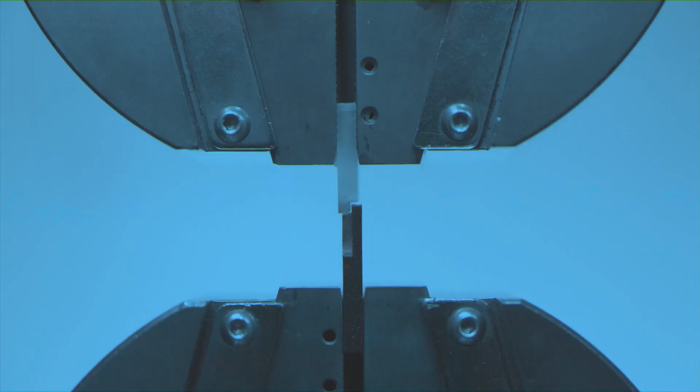We know now how to design the joint for tomorrow. But what about its behavior in 10 years or 20 years? What about the effect of water, temperature, fatigue, the loading type? These topics will be discussed in the last module, module 12, durability.

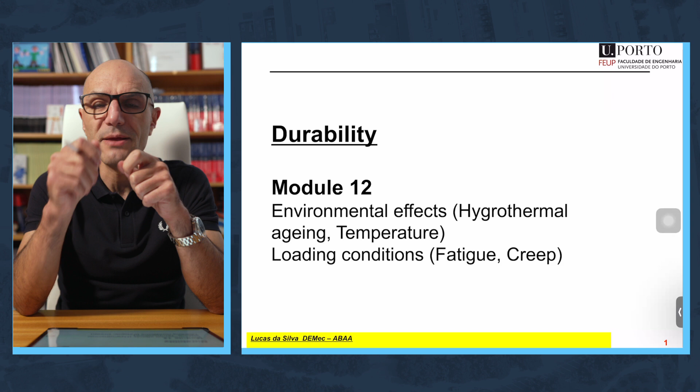So now we know how to design our joint, but only for tomorrow. We don't know how to design in the long term, taking into account effects such as water, temperature, or the loading type such as fatigue and creep. That's what we are going to see now. This is a very important issue: durability. So let's start with the hygrothermal aging effects.

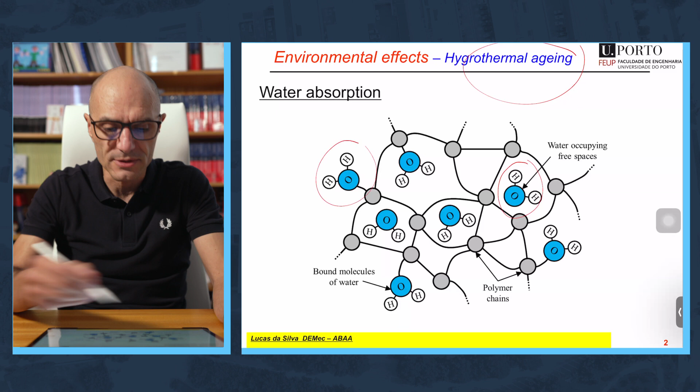Adhesives are polymers, and polymers absorb water. The water can diffuse inside the adhesive, filling gaps between the molecules, or combine with the molecules—this is called bound water. But what we want to know is how fast the water ingresses, diffuses into the polymer.

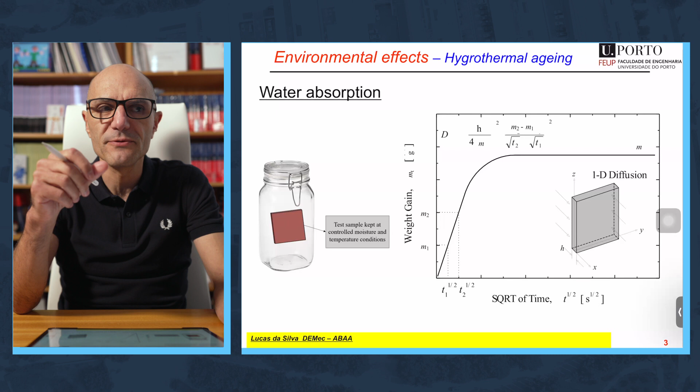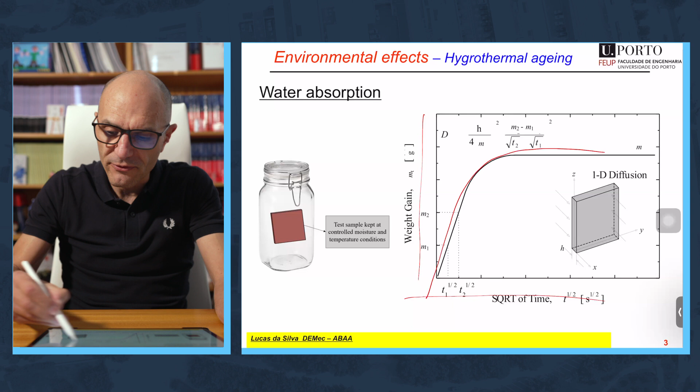This can be done by weighing small samples of the adhesive periodically. If we represent the results in a graph, weight gain versus square root of time, we get this type of curve. With this curve, we can determine the coefficient of diffusion of the material.

It's important to know how fast the water goes in, but it's also important to know how the water affects the stress-strain curve. For that we take dog bone specimens, tensile load them, and see how the stress-strain curve looks.

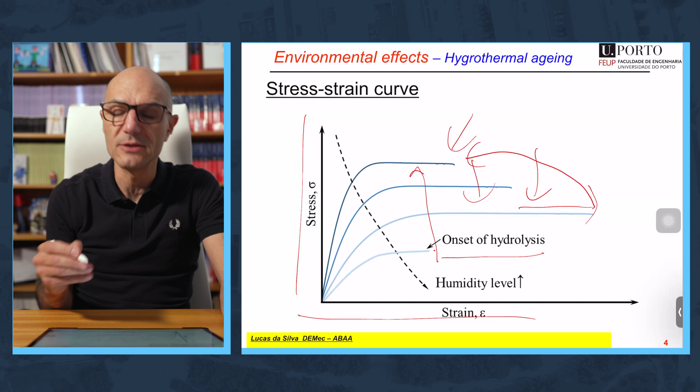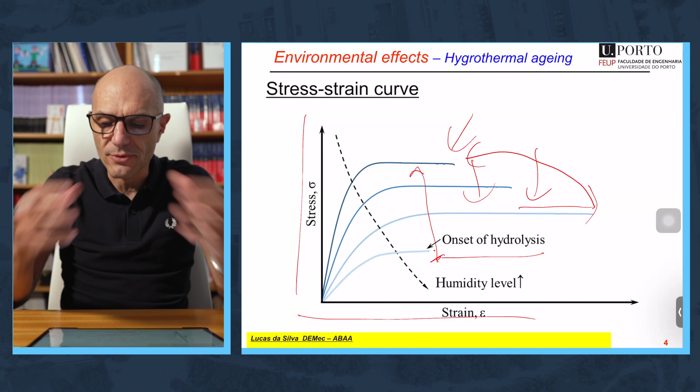In that case, you cannot go back by drying the adhesive. Here, if you dry, you can go back—it's called physical degradation. When you have chemical degradation, it's over; you cannot recover the adhesive. So a bit of water is not bad actually, because it increases the ductility, and we know that ductility is very good for the joint strength. We have seen that in the joint design part.

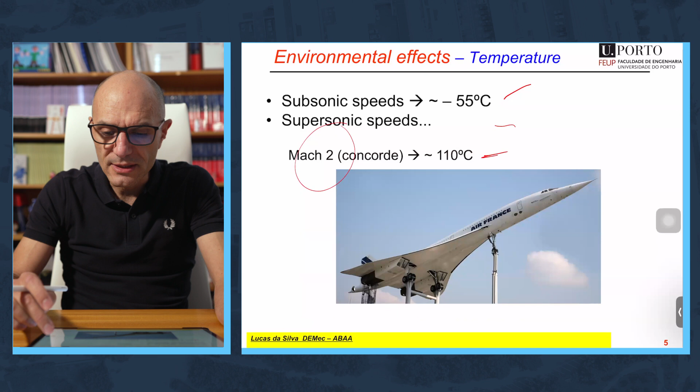The temperature we know, we have discussed that previously. When we go at subsonic speed, we have very low temperature, but if we go at supersonic speeds, for example Mach 2 Concorde, we can reach this temperature. So it's important to determine the adhesive properties when you have temperature fluctuations.

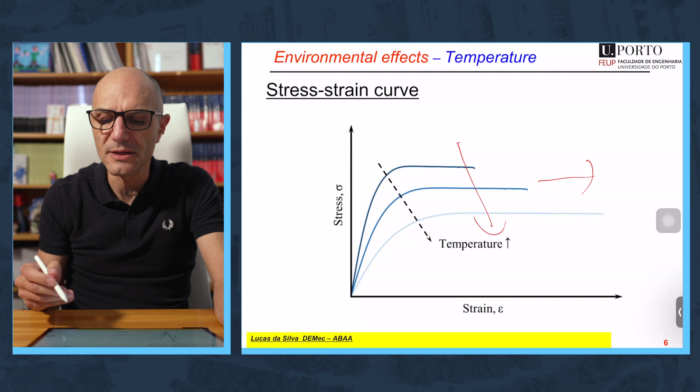We know that as the temperature increases, the strength decreases and the ductility increases. Again, a bit of temperature is not bad because we get higher ductility. But be careful, we cannot go above the Tg, because then we lose completely the strength. So that's for the environmental factors.

What about the loading conditions? Starting with the most important one, which is fatigue. Fatigue is probably the most important loading condition when we design an aircraft, and fatigue is basically caused by the pressurization of the aircraft, which is done every time you fly. One flight equals one cycle.

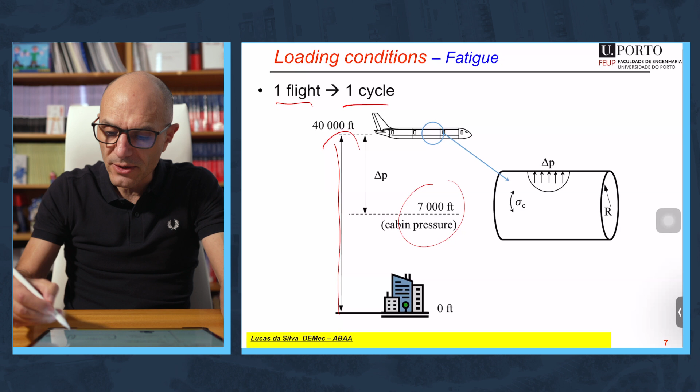That's because we fly at very high altitude, and we need to put pressure inside so that we have a pressure more or less equal to the pressure at 7,000 feet, which is breathable. This pressure will cause tensile loading in the joints, which can be rivets and adhesives. The loading can be more or less irregular, but in the laboratory we apply a perfectly regular type of load.

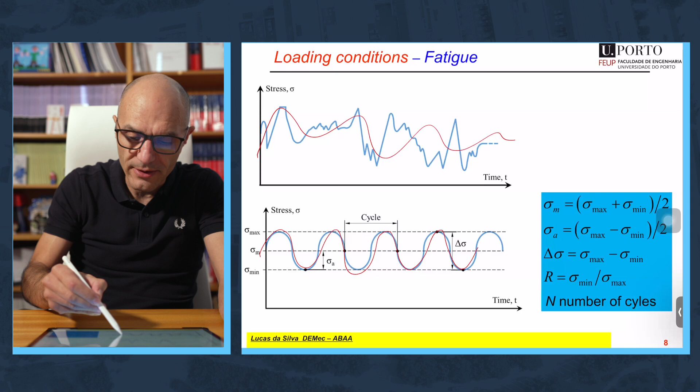Here you have all the nomenclature, the definitions for the stress components associated with this stress wave. That's not the most important part—what's most important is to understand which approaches we have to design in terms of fatigue.

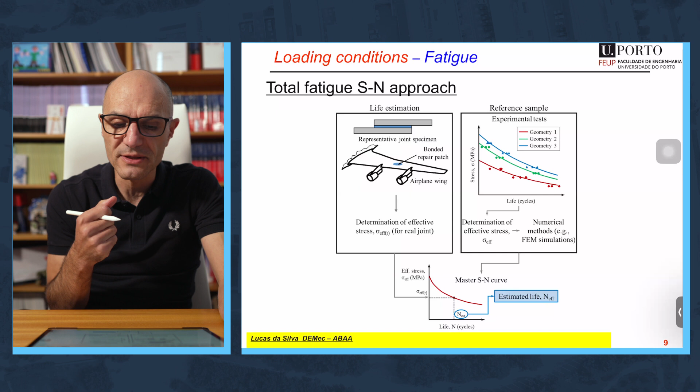The first approach is the total fatigue S-N approach. You have an S-N curve where you have the stress applied as a function of the number of cycles. Typically you get a curve like that. You apply this in a joint close to the real joint, and you know for a particular stress how many cycles the joint will withstand.

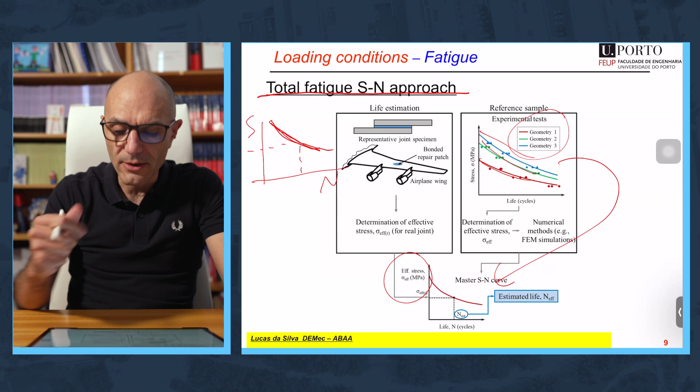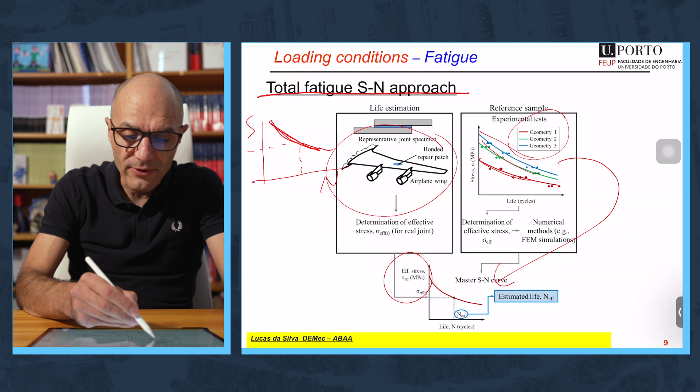In this slide you have something a bit more complicated, because this SN curve can vary a lot as a function of the geometry and the loading mode, whether it's mode 1 or more mode 2. We have recently been looking at this, and generated different types of SN curves as a function of geometry, collapsing them into one using an effective stress component that takes into account several types of stress. This allows us to have one curve that accounts for geometry and mode mixity. In practice, what you need to do is a finite element analysis of your aircraft, and for a particular effective stress you can determine the number of cycles to failure.

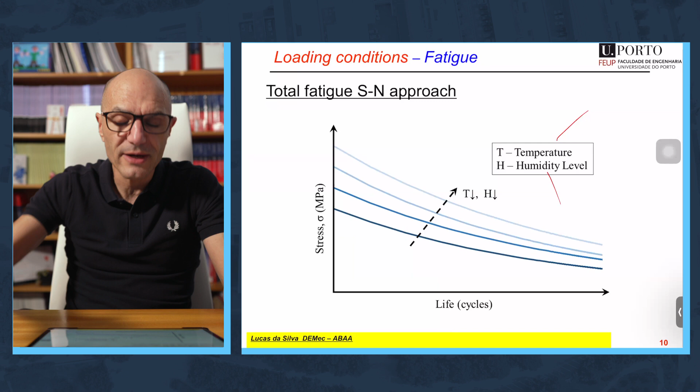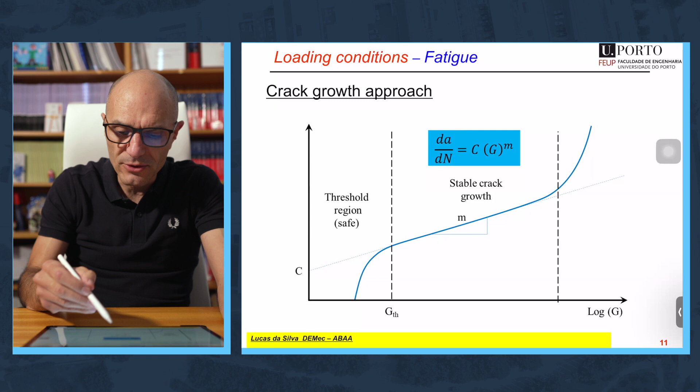This will depend on temperature and humidity level, so if you want to take these into account you need to generate SN curves for these conditions too. That's the first approach, the total fatigue approach, the SN approach. The other approach is the crack growth approach, which assumes the adhesive has cracks and tries to calculate how fast the crack grows in one cycle. For this you need to generate the Paris law of the adhesive.

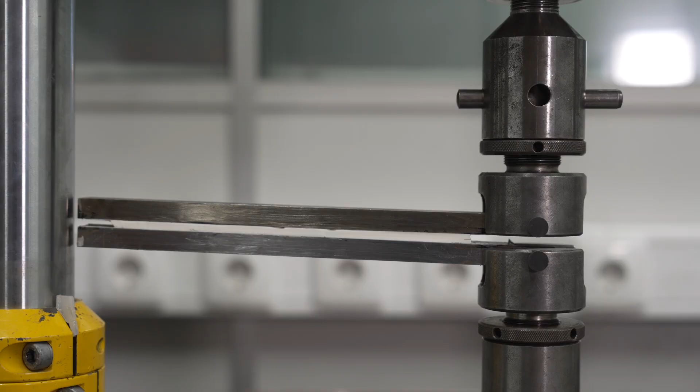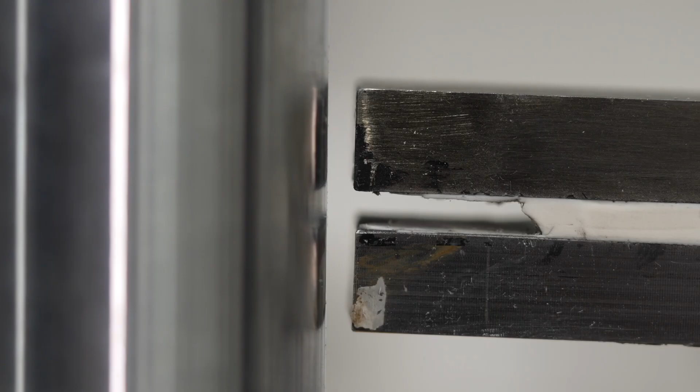When a joint is subjected to fluctuating stresses like this one, it will experience a specific type of damage known as fatigue. So it's important to characterize adhesive joints in terms of fatigue, specifically fatigue crack propagation. In this DCB test, we apply cyclic loading to the joint and analyze the rate of crack propagation. The crack propagates from a small size to a big size, and we analyze the rate of crack growth under cyclic loading conditions.

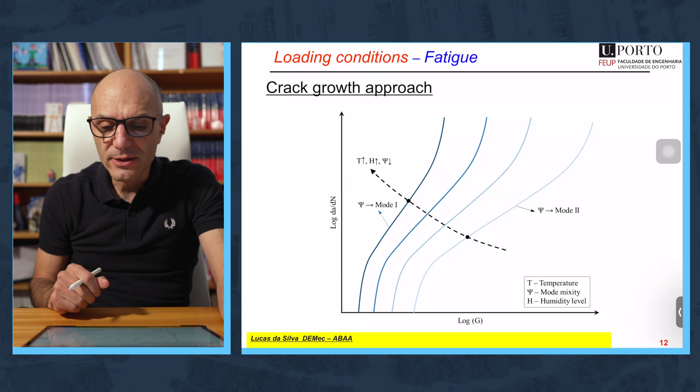Again, the Paris law will change a lot with temperature, mode mixity, and humidity level, so a lot of data needs to be generated. Fatigue is really one of the main concerns when designing aircraft, and as I've told you since the beginning, adhesives are used everywhere in the aircraft, but be careful, they are used only in secondary structures. That means structures that, in case of failure, will not damage the aircraft completely, and the aircraft can still fly.

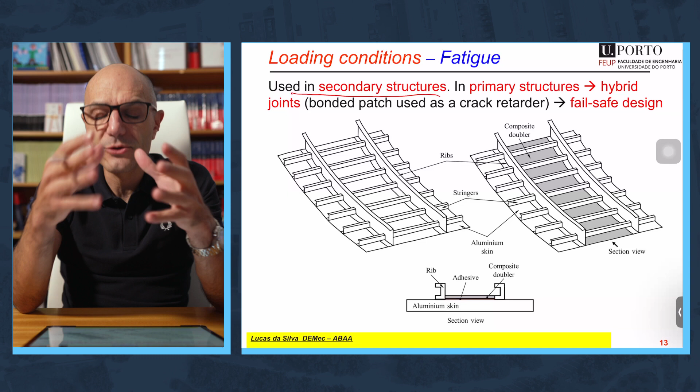They are not used alone in primary structures. If they are used in primary structures, then they are used with hybrid joints, meaning you put the adhesive plus something else. Imagine the fuselage, you have the stringers, you have the ribs - this is generally reinforced with a patch adhesively bonded. Then you have a hybrid joint with rivets plus the adhesive. This is in line with the fail-safe design approach used in aircraft, where in case one fails, you still have the other one. It's much safer, and this is used in primary structures.

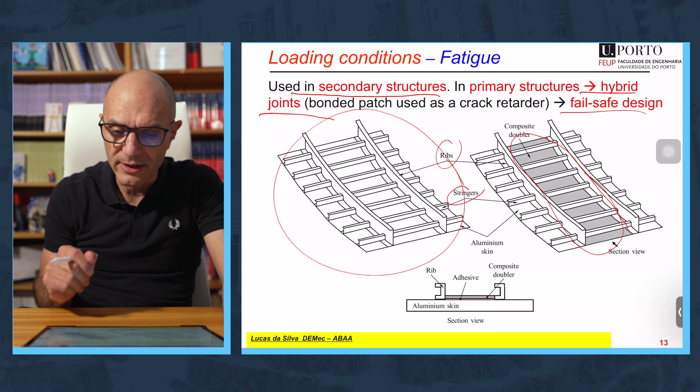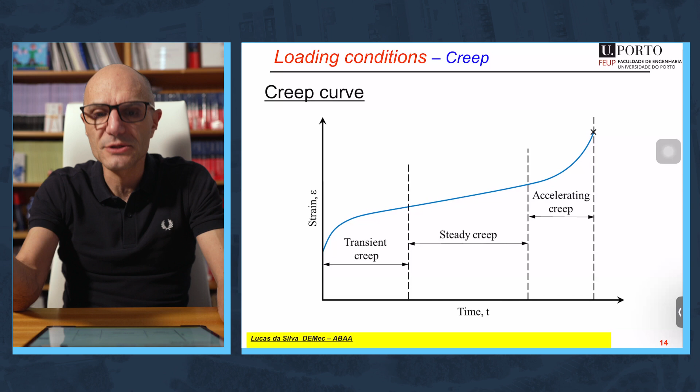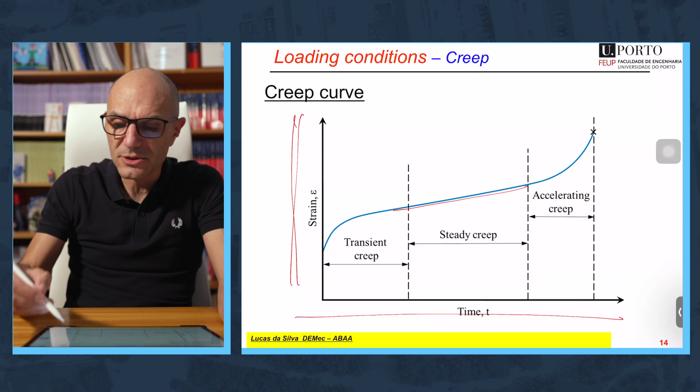Temperature, we have talked about that. If we talk about temperature, we need to talk also about creep. This is especially important for supersonic aircraft or for aircraft with the joint close to the engine. So you need to generate the creep curve, strain versus time, and define the strain rate in the second stage and the time to failure. This, of course, varies a lot with temperature, applied stress, and humidity level.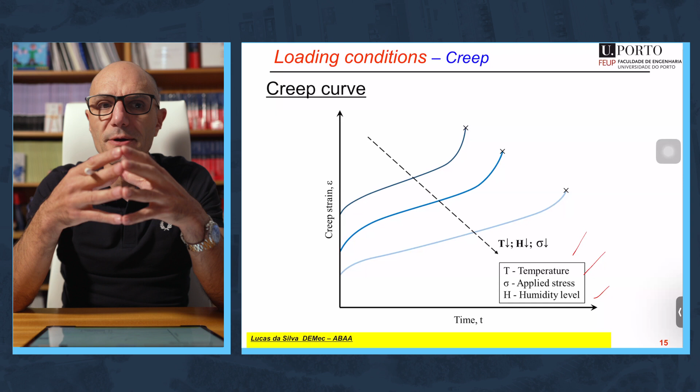So if you want to design taking into account all these factors, you need to generate an awful lot of data. The durability is a very, very time-consuming subject, but you need to do it if you want to have a realistic failure load prediction in the long term. But again, we are talking about very complex issues, and in terms of research, that's probably the most important research topic in the world of adhesive bonding at the moment.

This concludes this series. We have 12 modules on adhesive bonding applied to aeronautical and aerospace applications, useful at the master level for people interested in aeronautics and aerospace. If you want to know a bit more, there is another series with 30 modules where adhesive bonding is described in more detail.